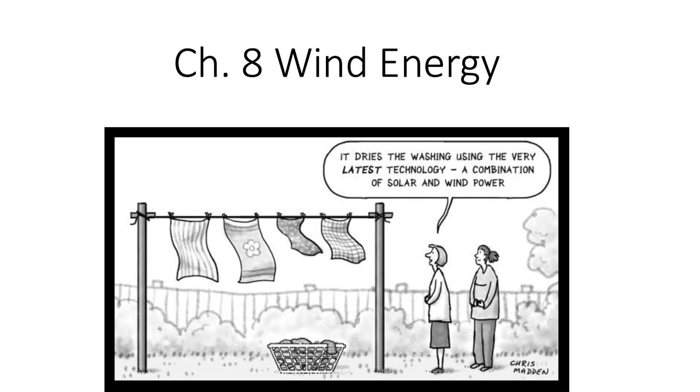Wind and solar have scaled up faster than any other sources of electricity in history. This is remarkable, showing how long it took to go from basically zero to 100 terawatt hours to 1,000 terawatt hours. For hydro, almost 40 years; coal, 32 years; gas, 28 years; nuclear, 12 years; wind, 12 years; solar, 8 years. That captures just how fast these technologies are growing.

Now, windmills are nothing new. The Persians are said to be the inventors of the first windmill sometime in the first millennium AD, and many think the design spread to Europe via the Crusades, but we really don't know.

The Persians used wind energy to crush grain, and then in the 1800s, one of the things that really opened up the West, especially the Great Plains, was the invention of the Halladay windmill, which you see everywhere out in the countryside.

The first offshore wind farms began operation in the 1900s - I wonder if that shouldn't be onshore. Then in the 2000s, there are incredible numbers of millions of homes powered by wind energy. And over on the right, we see the famous Dutch windmills.

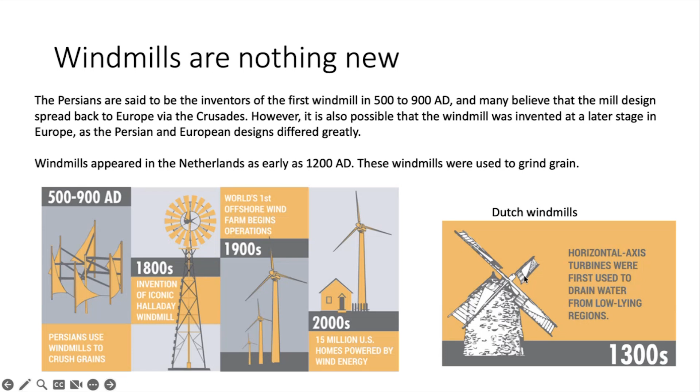That juxtaposition of the Persian design, with a vertical shaft and vertical axis of rotation circulating around, and this horizontal one that the Dutch modified - those are the two technological philosophies behind windmills. We'll see that it's been the horizontal axis that has taken over.

There are two main types of wind turbines today: horizontal axis wind turbines, or HAWT, and vertical axis wind turbines, or VAWT. We'll see different views of the horizontal type over and over again, and we won't talk much about the vertical one. One difference is that the HAWT has to be pointed in the direction of the wind, and the VAWT does not, but it's not hard to do that now.

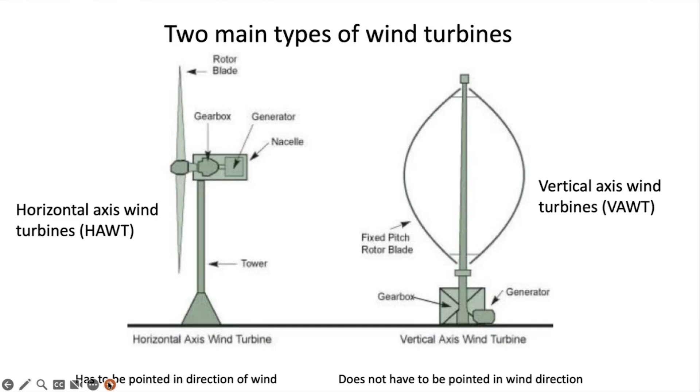Your book shows examples of a VAWT in Quebec. Currently, commercial development focuses on these HAWTs for turbines that generate more than a megawatt of electricity, and we're going to explain why later.

Watch this 2-minute video.

We've all seen those creaky old windmills on farms, and although they may seem about as low-tech as you can get, those old windmills are the predecessors for new modern wind turbines that generate electricity. The same wind that used to pump water for cattle is now turning giant wind turbines to power cities and homes. Have a look at this wind farm in the California desert - a hot desert next to tall mountains, an ideal place for a lot of wind. Here's another one on the windy prairies of Wyoming. Today's wind turbines are much more complicated machines than the old prairie windmills, but the principle is the same: both capture the wind's energy.

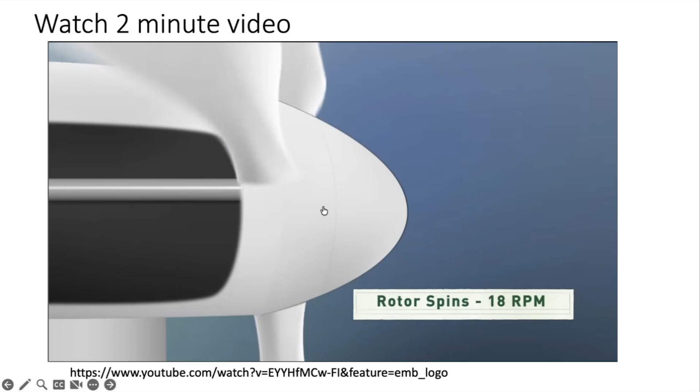Now, the blades are attached to a shaft, which only turns about 18 revolutions a minute, and that's not nearly fast enough to generate electricity by itself. So the rotor shaft spins a series of gears that increase the rotation up to about 1,800 revolutions per minute, and at that speed, the generator can begin to produce electricity.

So why are wind turbines so tall? Well, the higher up you go, the windier it is. More wind naturally means more electricity. Larger turbines can also capture wind energy more efficiently. The blades can sweep a circle in the sky with a diameter longer than a football field.

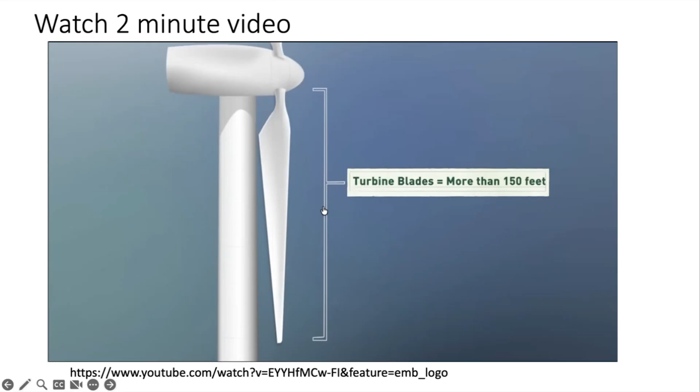Now, what's really cool is that even a small wind farm like this one in Wyoming can generate enough electricity to power more than 9,000 homes. And larger farms can provide much more clean energy for our homes and businesses.

And it's not just on land that turbines can capture the wind. Our oceans and the Great Lakes provide a reliable and consistent source of wind that we can capture and turn into electricity. The Energy Department is supporting innovative offshore wind projects that will help build some of the first offshore wind turbines in U.S. waters.

As the wind energy industry continues to grow, offshore development has the potential to significantly boost domestic renewable energy production, especially in coastal areas. With more than 50% of the U.S. population living within 50 miles of a coastline, capturing wind off America's shores has the potential to provide energy to countless homes and businesses. Wind energy, on land or offshore, a reliable and renewable clean energy source, helping move America toward energy independence.

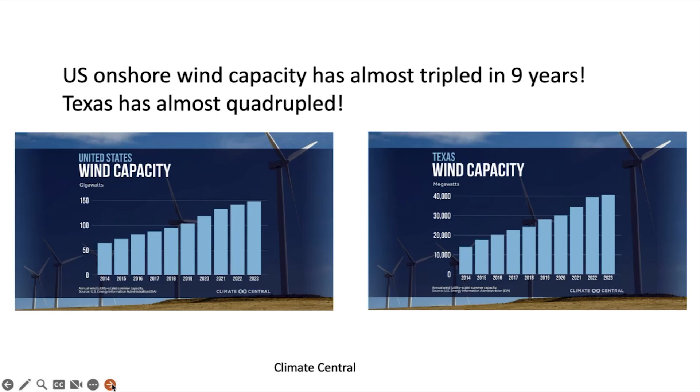Yes, Clint. This would be a good place to put in -- I'm interested in where the wind energy is being generated in China. Like, for example, Texas is uniquely adapted, the western part of the state, for wind energy, whereas some of the mountain states aren't so much, even though there's high wind in there. And of course, China is quite varied geographically.

Well, that sounds like an excellent idea for a student project.

All right, so as I said, Texas is by far the leading U.S. state in terms of wind energy because it's such a leftist, tree-hugging state. You know, it's far ahead of all those other states. I'm being funny, I'm being funny. So I mean, it just stands out, am I right? Laughing, I'm laughing.

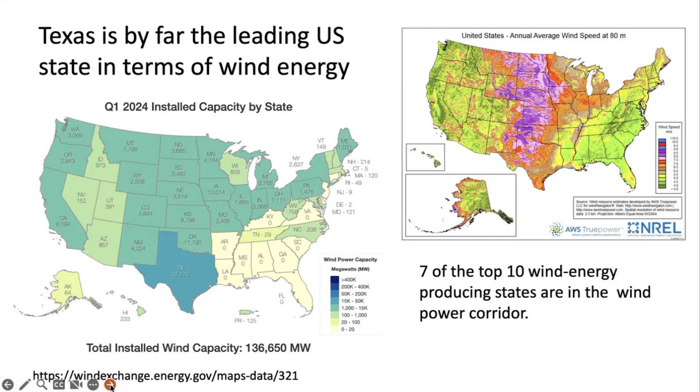So 7 of the top 10 wind energy producing states are in the wind power corridor: Texas, Oklahoma, up through here. They're all taking advantage of that energy source. Wind is number 2 and a rapidly growing part of the ERCOT energy mix.

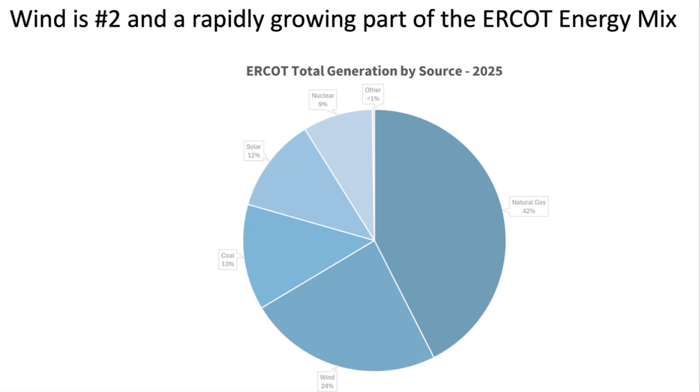We've talked about this before. Natural gas, both kinds, generates 42% of electricity. Wind is 24% and growing. Coal is 13% and shrinking. Solar is 12% and growing. Nuclear too. It's quite amazing how much of Texas's electricity is generated by renewable sources or non-CO2 generating sources.

So now we get into the book's discussion of noise and visual impact, because politicians will say things like, 'Oh, wind turbines are a health hazard and they're unsightly,' et cetera. The book talks about this.

Wind turbines emit a weak noise mainly generated by the movement of the blades through the air, producing a swishing or whooshing sound. There's also noise from the turbine machinery, which can be annoying to those nearby, but generally these wind turbines aren't near population centers. The latest wind turbines are much quieter than those of 50 years ago, and noise from the gears and generator has been reduced—that's easier to reduce than the noise the blades themselves make.

The noise from a modern wind turbine is like that of a tractor. A typical 1980s turbine generating 100 kilowatts, which is lower than today's, and a 1990s turbine generating 500 kilowatts, both emit about 100 decibels.

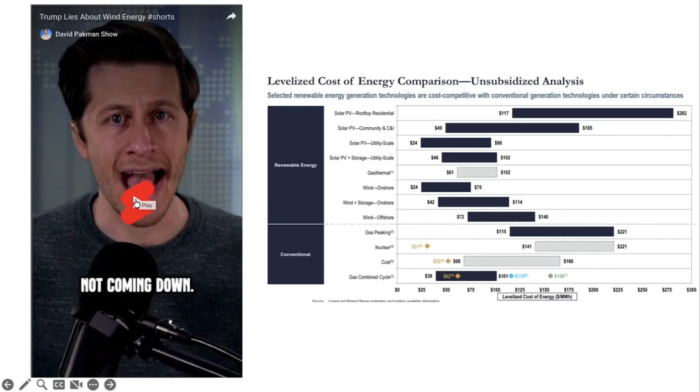On building infrastructure that's no good, but environmentally friendly, on doing windmills all over the place that are, by the way, the most expensive energy in the world. You cannot get more expensive. Now remember, windmills are not coming down—more windmills are being built. They're not even, I don't even know why I say windmills—more wind farms are being built than the number that are being decommissioned.

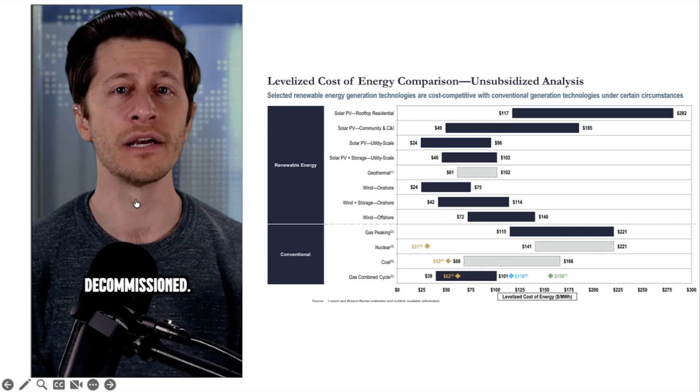I think what he's referring to is that the blades ultimately need replacement. It's not the most expensive form of energy—in fact, it's quite efficient. It has high initial costs to build the wind farms, but Trump doesn't care and his followers don't care.

All right, so let's go to the life cycle greenhouse gas emissions, land and water use. The next topic in your book.

There's a few tens of grams of CO2 emitted per kilowatt hour for wind generated electricity. The actual generation, the rotating turbine, doesn't put out any CO2, but you have to consider what it costs to create all the components that go into a wind station, and factor that out over the lifetime of the turbine itself. So it's a few tens of grams of CO2 per kilowatt hour versus about 1,000 grams per kilowatt hour for coal generated electricity. So it's ridiculous to talk about them as being anything other than environmentally friendly.

The wind turbines use very little water, but there is a reality that constructing a wind farm can cause erosion and disrupt wildlife habitat. And you see this all the time.

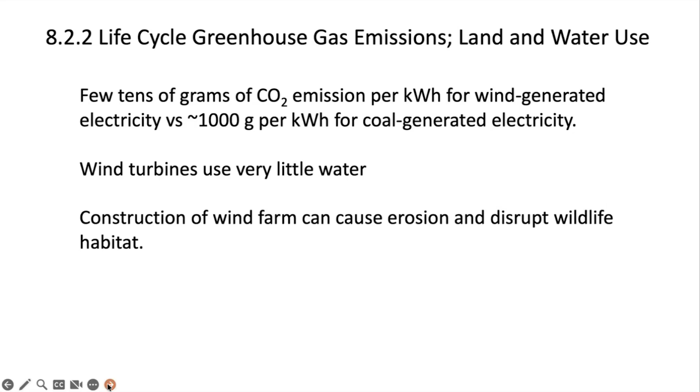All right, well, so you see this, right? Yeah, it shows up all over the place. And yeah, disposing of obsolete blades can be a problem. There's no question about it.

And the book says if we used radar to monitor migratory bird flocks, this could reduce bird fatalities even more. And we can use radar for that purpose.

There are higher rates of fatalities due to wind turbines for bats than for birds. Birds can see the turbines and avoid them. Bats use a kind of sonar to navigate, so they can be killed by what's called barotrauma, which leads to internal hemorrhaging due to rapid changes in air pressure around the rotating turbine blades. So if people were opposed to wind turbines because of their love of the bats, that would be a different matter than their love of the birds, because it's just nonsense that wind turbines are killing birds.

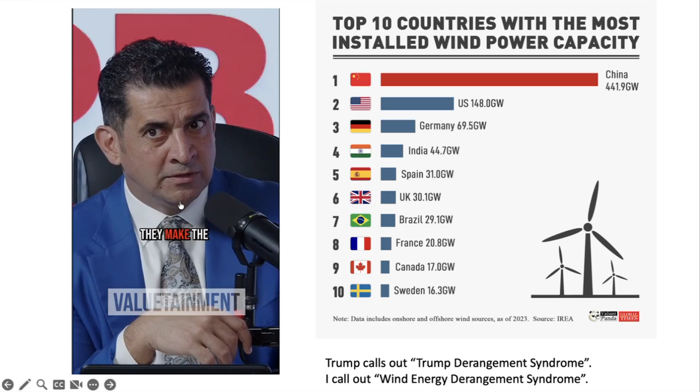Trump comes out and says the only person winning off buying windmills is China, and he calls them stupid people who buy windmills. They make the components - watch this. Windmills all over Europe, there are windmills all over the place, and they are losers. One thing is, the more windmills a country has, the more money that country loses, and the worse that country is doing. China makes almost all of the windmills, and yet I haven't been able to find any wind farms in China. Did you ever think of that? It's a good way of looking at it. They're smart, China's very smart. They make them, they sell them for a fortune, they sell them to the stupid people that buy them.

Yeah, so anyway, Trump will every once in a while talk about somebody that has problems with him as suffering from Trump derangement syndrome. And I would have to say, well, if that's a real thing, then I think there's a wind energy derangement syndrome as well, and he clearly has a pretty good case of it.

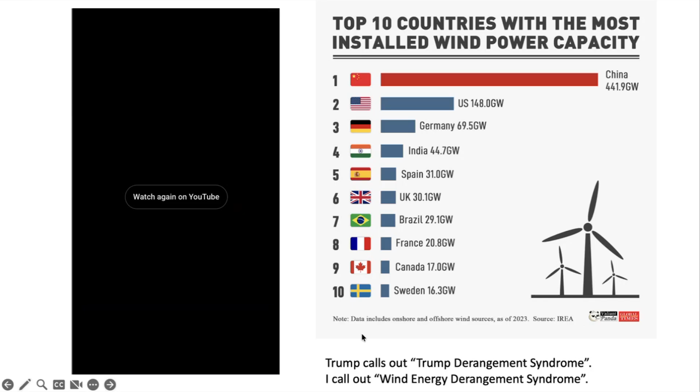Now the book goes into power and energy of wind. This is now a little bit of physics, but it's really interesting. Power is just work over time, which is just energy over time, and we quantify it with Newton meters per second, or joules per second, which is the same thing, and a joule per second is a watt. So wind towers are rated in terms of power capacity - the large ones have power ratings of 1 to 5 megawatts, probably bigger now.

So energy is equal to Newton meters - not per meter, that's a joule. So energy is how much work can be done by a force, Newton meters.

So wind energy is kinetic energy. It's moving. Here's the equation for kinetic energy: kinetic energy is 1/2 times the mass times u squared, where u is velocity. So that's the mass of the air, and that's the velocity in meters per second. You have to check the units: kilograms, meters per second squared, kilogram meter squared... yes, that's joules.

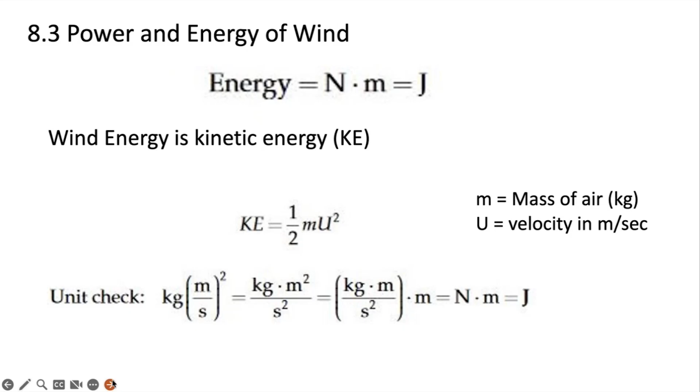Imagine a horizontal cylinder of moving air of area A swept out by wind turbine blades. This is the amount of air moving through the blades in a second. That's got a mass, right? That mass is equal to the density of the air times the volume. This is the volume of the cylinder, so that's equal to the density of the air times the area times the length. That length, the amount of material going through the wind blades, is basically the velocity times time. So the mass is equal to density of air times the area of the blade sweep times the velocity times time. Pretty simple equation - it's just the kinetic energy that wind energy holds.

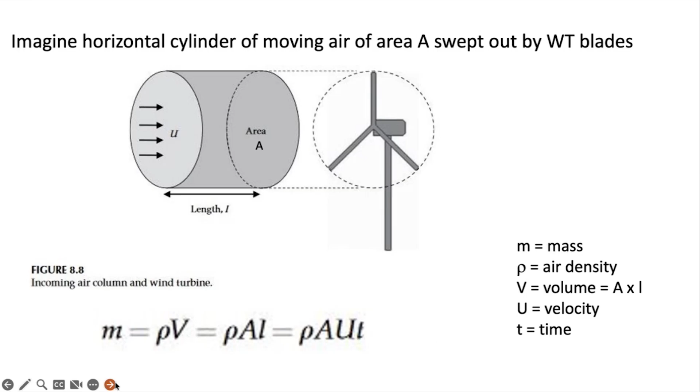In 2022, the average rated power of a new wind turbine in Texas was about 3 megawatts. That was a significant increase just from the year before.

The kinetic energy, we've already gone through that - we've seen this before. Combining the equations and solving, power is equal to kinetic energy divided by time. So that's going to be 1/2 density times area times velocity cubed. In order to get this area, that's just pi r squared, where r is the radius of the turbine. So the power scales with the square of the turbine radius and the cube of the wind velocity. This is very important: the power increases as the cube of the wind velocity and as the square of the blade length.

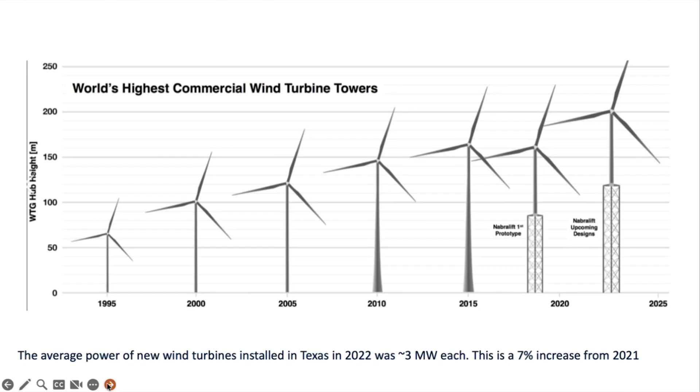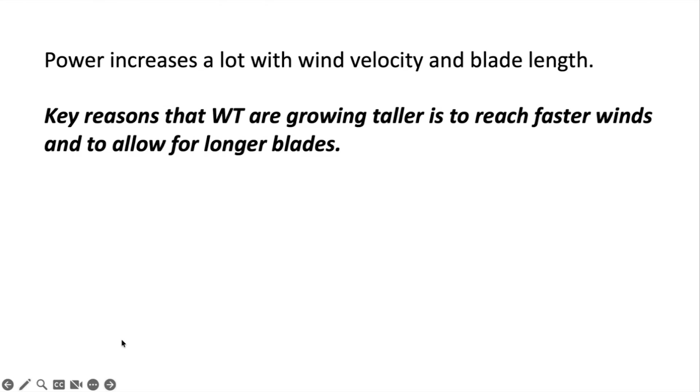So the most powerful wind turbine in the world that I could find is the Mingyang Smart Energy 22 megawatt. It has a rated capacity of 22 megawatts and a rotor that's over 310 meters long. That's amazing.

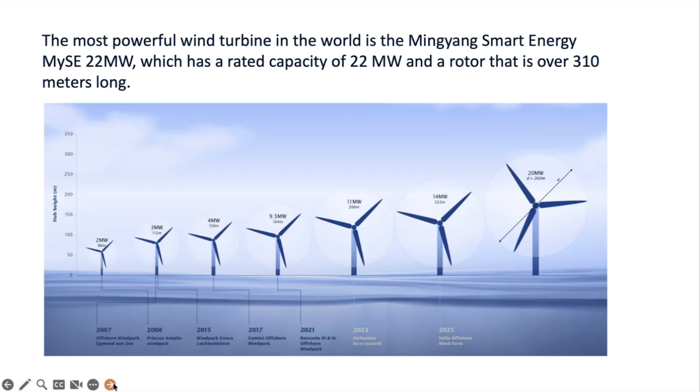Now let's talk a little bit more about how wind energy works. The book talks in section 8.4 about the coefficient of performance. This CP measures the percent of the wind power that can be extracted by a wind tower. So CP is the power in the wind turbine divided by the power of the wind.

We've already talked about the power in the wind by this kinetic energy equation. But in fact, the coefficient of performance for any wind tower is limited by what's called the Betz limit. I'll bet that's on the midterm. The Betz limit is only 59% of the available power in the wind. And you go, well, that's interesting. Why is that?

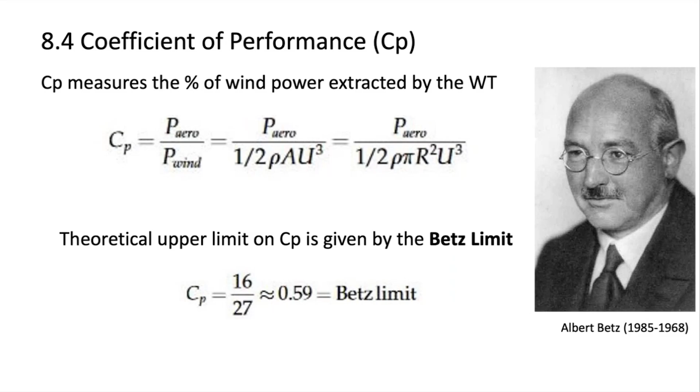So this is what your book explains. If all the energy coming from wind movement through a turbine was extracted as useful energy, the wind speed behind the turbine would drop to zero. If that happened, then no more fresh wind could come in—it would be blocked. So in order to keep the wind moving through the turbine, there has to be some wind movement, however small, on the other side with a wind speed greater than zero. This Betz limit basically addresses this quantitatively.

I'm not going to derive it, but basically the geometry limits any turbine efficiency to a maximum of 59.3%. Today, the most utility scale wind turbines achieve 75 to 80% of the Betz limit, so that's about 40% of the total wind energy that can be extracted.

The book also explains that, in addition, the coefficient of performance is a function of how fast the tips of the wind turbine blades rotate compared to the wind velocity. So the turbine tip speed ratio is omega R, where omega is the rotational speed—we talked about blades moving at 18 rotations per minute, converted to radians per minute, remembering a circle has about 6.3 radians in it. R is the rotor radius, and the wind velocity is in the denominator.

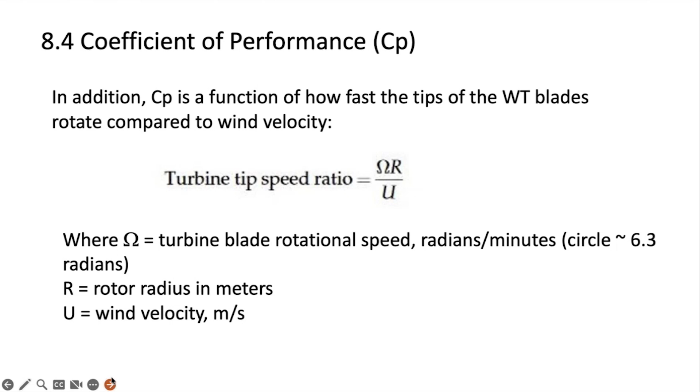This is basically showing the various turbine power coefficients. Up here is the Betz limit at 59%. This is the ideal efficiency of a propeller type turbine, like a wind turbine. It's lower until you get up to turbine tip speed ratios on the order of 4 from that equation. So here we've got different kinds of rotors.

There's a Savonius rotor—I don't really remember what that is. That's an American farm windmill, the Halladay type thing. These are Dutch multi-blade turbines. This is a modern vertical axis wind turbine, and this is a modern horizontal axis wind turbine. So you can extract more energy out of the wind using this technology than either of these others.

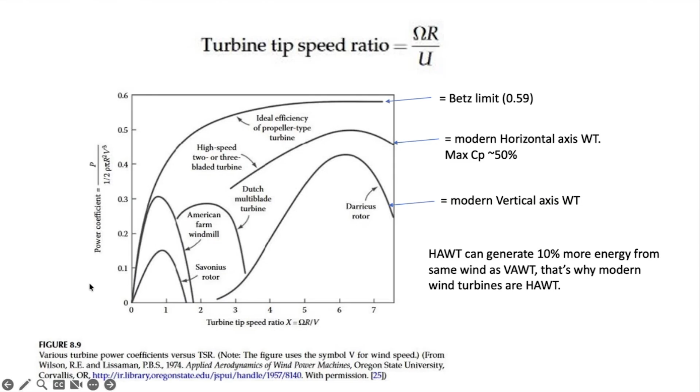In general, horizontal axis wind turbines can generate 10% more energy from the same wind as a vertical axis wind turbine. That's pretty much why modern wind turbines are all horizontal axis wind turbines.

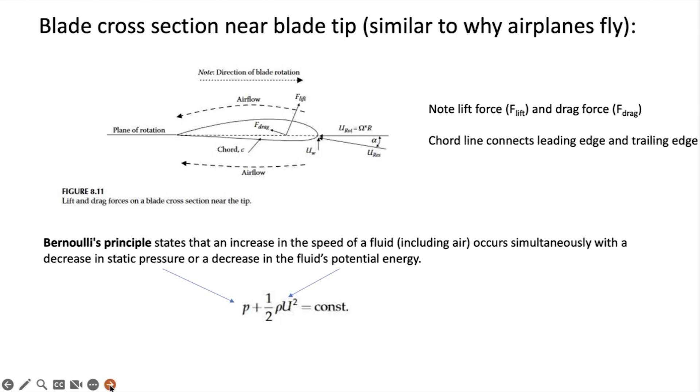This explains Bernoulli's principle.

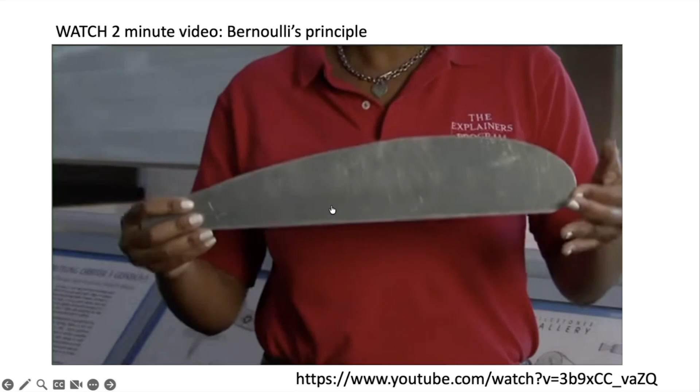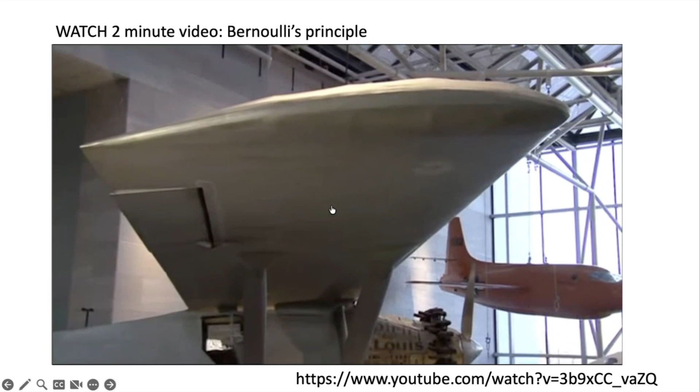Hi, my name's Jamila. I'm an explainer at the National Air and Space Museum's How Things Fly Gallery, and today I'm going to talk to you about lift. I'm standing in front of the Spirit of St. Louis airplane. It was flown in 1927 by Charles Lindbergh, and it was the first successful solo flight over the Atlantic Ocean. Now, how was this plane able to generate lift? How was it able to stay in the air? I can explain that using this airfoil here. An airfoil is like a cutout or a cross-section of a wing. So if I were to take a wing and slice it into pieces like a loaf of bread, this would be one slice of the wing. Now, if we compare this airfoil to the Spirit of St. Louis, we'll notice they have very similar shapes. They have curved tops and flat bottoms. An airplane's wing will be shaped this way because of something called Bernoulli's principle. Daniel Bernoulli was a Swiss mathematician who studied the movement of fluids like air and water, and he realized that a faster moving fluid will have a lower pressure, while a slower moving fluid has a higher pressure. Now let's apply this to our airfoil, or to a wing, so that when the plane starts flying and air hits the wing, you're going to get faster moving air on top. It's going to speed up because of the curve. At the bottom where it's flat, you're going to have a slower moving air, not as fast as the air on top. That slower air is high air pressure, and the faster air is low air pressure. That high air pressure pushes up on the airfoil or up on the wing, and that's why something as heavy as an airplane can fly. Don't believe me? Well, I have an experiment we all can try at home with a single sheet of paper. If I were to place this paper beneath my lips and blow, would it go up or would it go down? Let's see what happens. We notice that the paper goes up, and the reason why is because of Bernoulli's principle. When I blew my fast air on top of the sheet of paper, it was a lower pressure than all of the air in the room, because the air in the room is slower than the air that I was blowing. So that high air pressure works from beneath and it pushes up on our sheet of paper. And the same thing is happening to an airplane's wing, and that's why something as heavy as an airplane, like the Spirit of St. Louis, is able to generate lift.

She's talking about airplane wings, but the same thing applies to turbine blades. Instead of using that shape to lift a heavy object in the air, that pressure difference causes the blades to rotate. It's not the wind pushing the blades, it's the wind blowing around the blades that's causing the lift force that causes the rotation.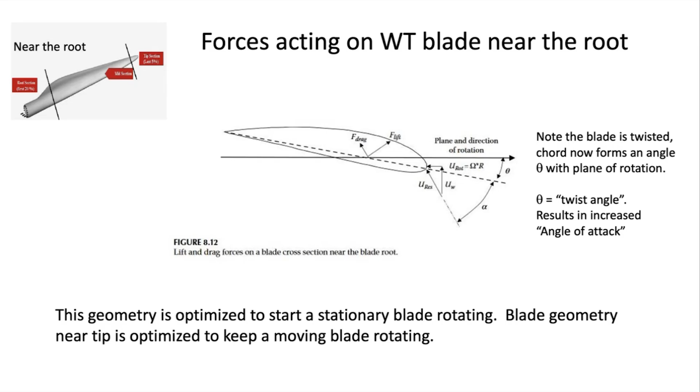All right, now this gets us to the physics of wind. The wind is different. We've already seen that map of the United States showing the wind in the high plains is optimal, the wind power corridor is this region. Most of what we've been doing now, you might ask, what's this got to do with earth science? But now we can talk about winds, which is earth science.

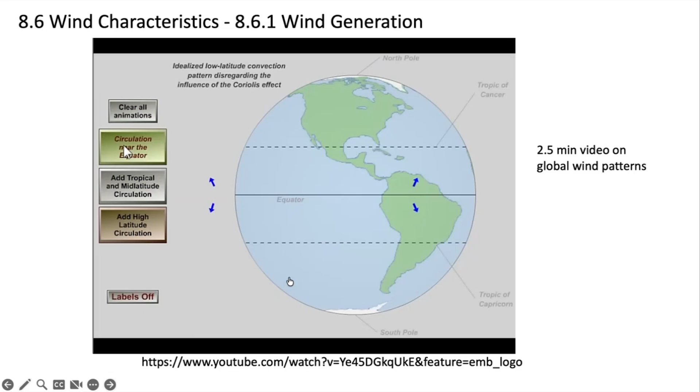This animation shows global wind patterns and the reasons the air circulates the way it does, and patterns of rising and sinking air and how that relates to precipitation. The engine that drives it all is the intense heating by the sun near the equator, where the sun shines at a very high angle of incidence. This hot air near the equator, being less dense, rises upward, moves toward the poles, and gradually sinks at about 30 degrees north and south latitude. This creates big spinning circles of air called Hadley cells.

Near the equator where the air is rising, it loses its ability to hold moisture, and you get a band of high rainfall and low pressure because air is leaving the equator. Where the air sinks in these belts around 30 degrees north and south, you get high pressure sinking air, which creates areas of clear skies and desert climates.

Now, as this air circulates and tries to flow back toward the equator along the Earth's surface, or as some heads toward the North or South Pole, the Coriolis effect, the spin of the Earth, causes it to bend and turn, creating the two big wind belts that prevail on Earth: the trade winds, northeast and southeast trade winds, and the prevailing westerlies. These winds curve in the way they do because of the Coriolis effect. They curve to the right of their path north of the equator, and to the left south of the equator, ending up flowing from east to west or west to east.

Now the other big factor is what's happening at the poles. At the poles, the air is cold, and the cold air wants to sink. As that cold polar air sinks, it heads toward the equator and bumps into air heading toward the pole, creating an area of rising air. Rising air produces high precipitation belts at about 60 degrees north and 60 degrees south latitude. At the poles themselves, precipitation is quite modest because the air is sinking, creating low precipitation.

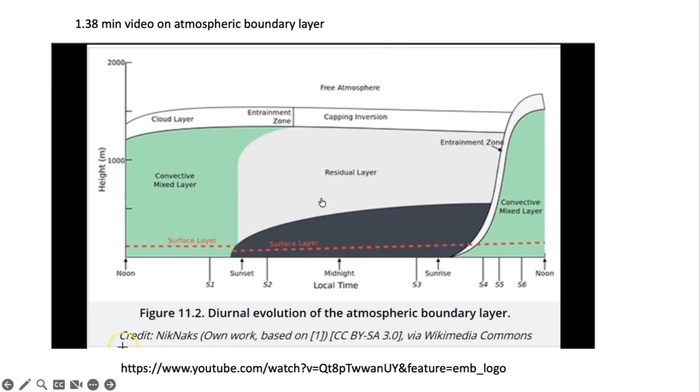Okay, here's a question for you: learning that, what time in a 24-hour day would you get the best performance out of a wind tower? Anybody?

Afternoon? No—in the afternoon, the atmospheric boundary layer is well developed and tall. At night? Yes, at night, because the atmospheric boundary layer collapses and is closer to the surface, and then in the daytime, as it heats up, it rises again. So you have all of this turbulence, and wind towers don't like turbulence. We're going to talk about turbulence again.

All right, so back to this map. Does everybody understand that one of the challenges is that wind energy is at a maximum at a time you don't really need the electricity? It'd be nice if the maximum time was in the afternoon, because that's when our demand is high, right? And people are awake.

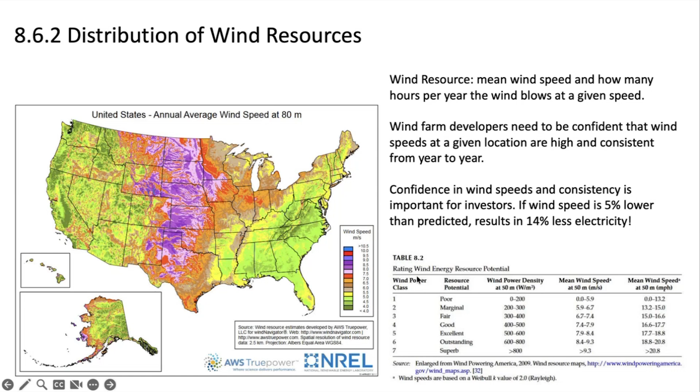So why are the U.S. high plains so windy? We didn't see anything in either of the videos that would help us understand why the wind power corridor is where it is.

So I reached out to a professor at Texas Tech, who is well known for his work in wind energy, and he responded to my email: 'I believe that for the South Plains, the key factors are the high frequency of clear skies and the elevation, particularly during the cool seasons. That promotes mixing down of the stronger winds aloft.' So that's what he had to say about why the wind corridor is where it is.

Now there are some other considerations that are useful to think about. We've seen the wind power corridor over and over again, but the interesting thing is it's also a low population region, and wind farms are much easier to put up in areas where there aren't very many people.

You're always going to have complaints about wind power, from not only the President of the United States but also local populations. Anytime people see an opportunity for a lawsuit or a settlement, they might take it. So you want to be away from people, because the proportion of the number of complainers per unit area is some constant times the population of that area. So low population is good.

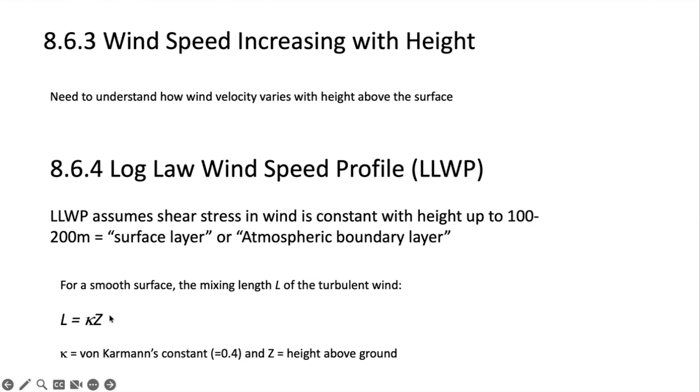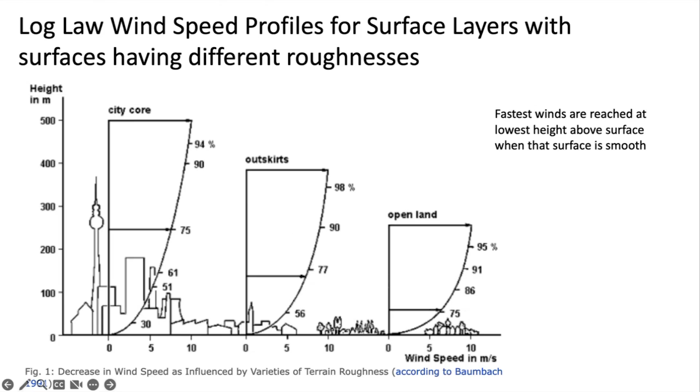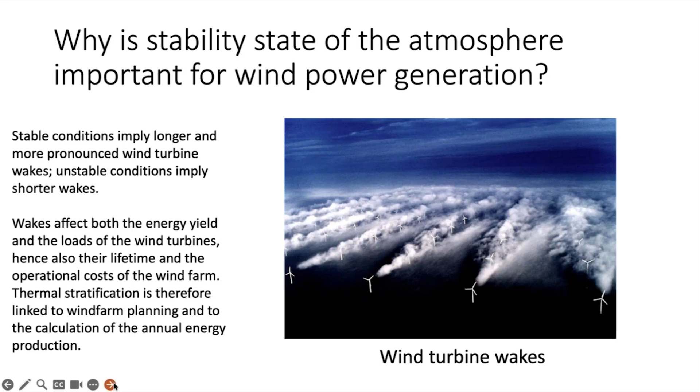Which one of these laws is most appropriate for the region being considered as a wind farm is important. Your book talks about that for neutral flows - remember we were talking about atmospheric stability, unstable sinking, rising. So for neutral flows, alpha is about 0.143. For unstable flows, alpha is less than 0.1. And for stable flows, alpha is greater than 0.3.

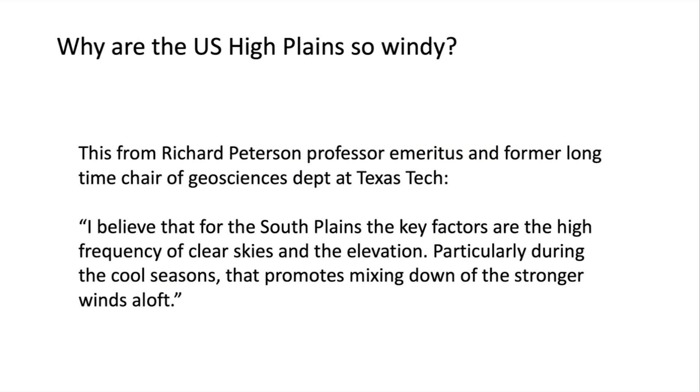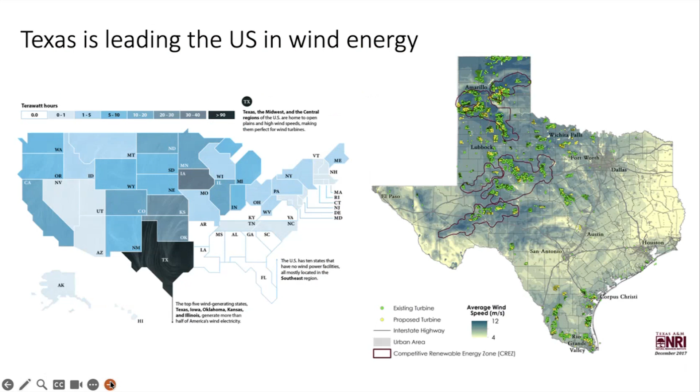So you're looking for something that's going to give an alpha as high as possible. You can see the difference in the wind speed for those two alphas - there's an 89% greater power with a higher alpha. Getting this right is critical for any kind of budgetary analysis, projections about what's going to happen financially to the company.

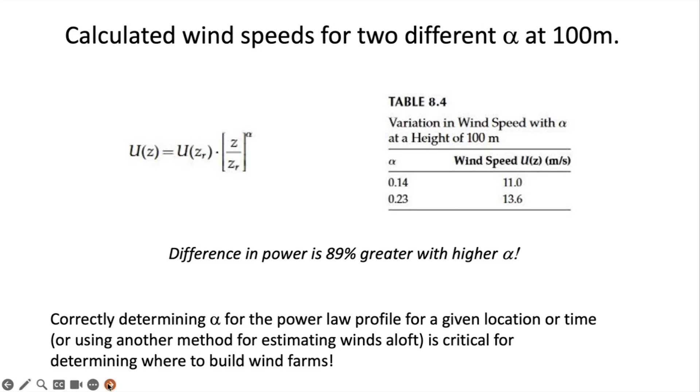Very important. So then the book goes into this probability of observing a given wind speed. Here we're looking at a Gaussian PDF. What you've got here is the frequency of events versus the magnitude of the event. This could be anything - earthquakes, oil fields, you name it. Grades, well maybe not grades, I don't know. But this is a Gaussian distribution, simple statistics. That's a normal probability density function.

Here's the mean of all the values. And this area relative to this entire area is the probability of some velocity of some thing happening at this interval. So you need to understand the probability of observing a given wind speed at the elevation you're interested in. So you're going, okay, that's pretty easy.

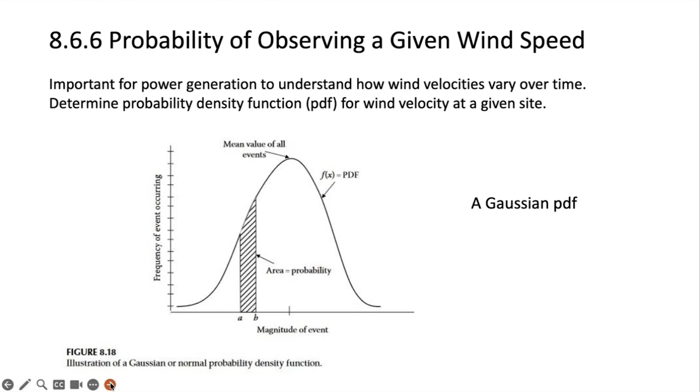And you have to measure it, figure out what it is at the elevation above the surface that you're interested in. So now wind turbines can't operate if there's no wind - that goes without saying - but they also can't operate if the wind isn't high enough. So one of the things a company wants to know is what percentage of the year will the wind velocity be too low for a wind turbine to operate? And this is the cumulative distribution function.

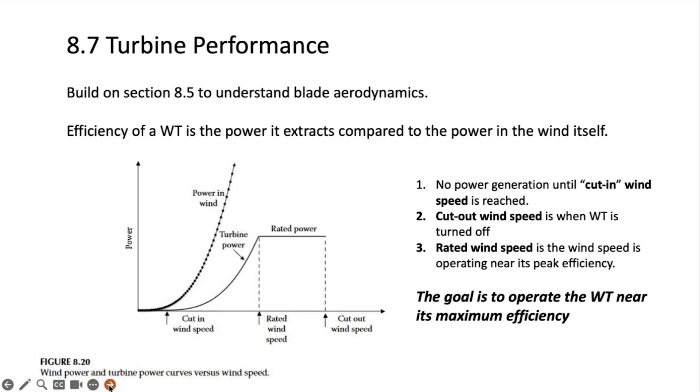So when we talk about wind power capacity, this is what's being considered. But the reality is, with the wind velocity probability density functions, it's not going to be that speed all year, even in the high plains.

Let's watch a video. Now a real wind turbine, if you look at it, it's going to take a bit of a wind speed to start. So there is a region from 0 wind up to a certain wind speed called the cut-in wind speed, where there's no power produced by the wind turbine. Also called region 1. Nothing's happening. Then once the cut-in wind speed is reached, power ramps up.

You can see that it's in an almost parallel slope to the power that becomes available with the wind speed itself, but it's only a certain fraction of that amount that the machine, the wind turbine rotor, can actually capture. And we're going to learn about how much that is. That region is called region 2.

Power ramps up. So ideally you want to produce power with wind turbines, want to make money, right? Want to sell the power. Ideally you want to go all the way up here, but you're limited. What limits you?

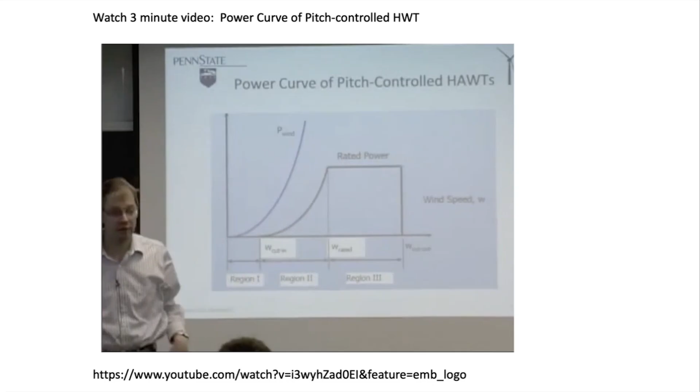Generator. Okay, first thing that limits you is the generator. Generator can only take so much power and feed it into the electrical grid. So you have to start controlling the power.

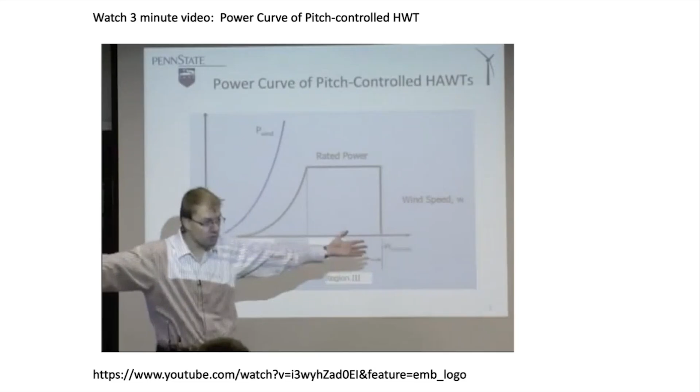That's the typical power curve of a modern pitch-controlled horizontal axis wind turbine. So you control the power by changing the blade pitch, changing the loads, and hence the torque and power produced by the rotor. That wind speed, where you reach the rated power of the turbine and the generator, is called the rated wind speed.

From there on, as the wind speed increases, you have to pitch more and more the blades to accommodate for the fact that more wind power is coming in, but you're only allowed to capture so much of that. So essentially, you have to adjust the blade pitch angle such that local angles of attack acting on local airfoil sections become smaller, hence the loads become relatively smaller, and the power stays the same.

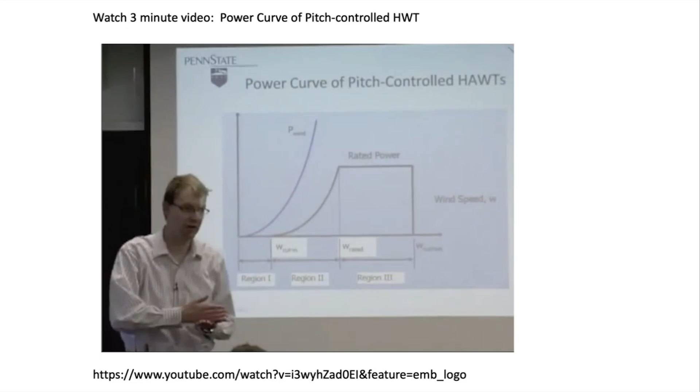So then at the end here, usually if the wind speed becomes about 25 meters per second, you have to shut down the turbine. Why is that? Not a generator problem. It becomes a blade loads issue, a load and fatigue issue.

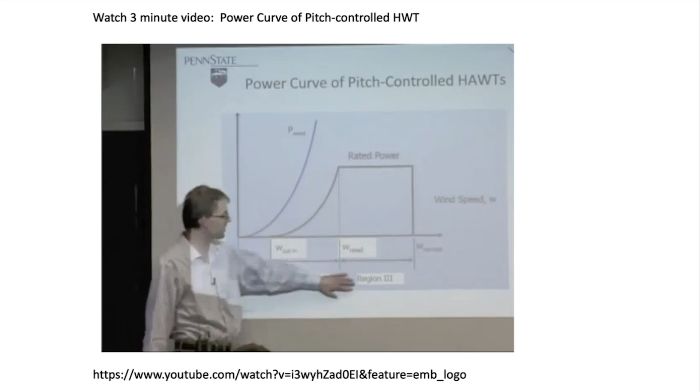So if it's a storm condition, in the storm you have more fluctuations, large amplitude, and that poses a problem. You have to shut down the rotor. So that's the cutout wind speed. We're having these three distinct regions in the power curve of a modern pitch-controlled horizontal axis wind turbine.

Now, we haven't talked about pitch control yet, but we will.

Disk theory. So we talked about the Betz limit and why there has to be some velocity in the air behind the rotor, but it's going to be a fraction of that coming in. So here we're looking at a very simple equation. The velocity of the wind is greater than the velocity of the disk. The air through the disk is going to be greater than the velocity of the air through the wake.

The mass of the air moving from left to right is constant, and because the velocity decreases behind the rotor, the area of moving air must increase. So the book talks about the axial induction factor, which is just the velocity of the wind minus the velocity of the disk divided by the velocity of the wind.

That varies from 0 to 1. A low A means a slow wind, and the upper limit on A is the Betz limit. Then the velocity of the wind through the disk is 1 minus A times the velocity of the wind. And then you can use Bernoulli's theorem to calculate the velocity of the wind behind the rotor and see how wide this region of wind velocity is going to be.

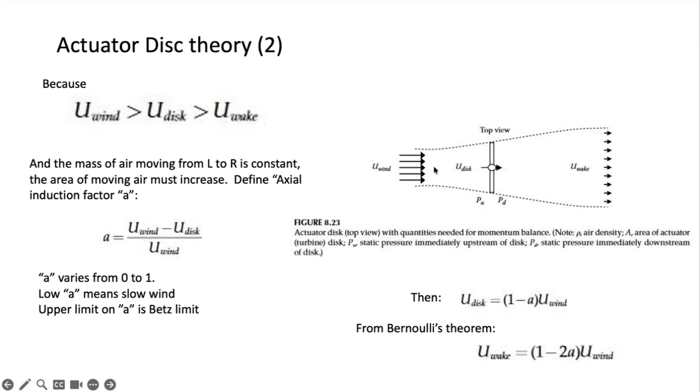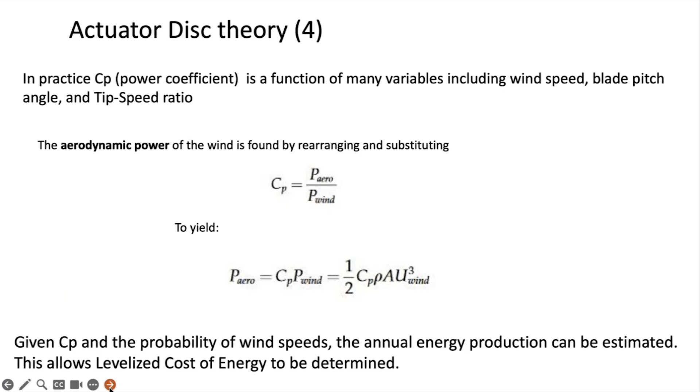All right, so here we're looking at an example from your book to determine the annual energy production for a wind turbine with certain characteristics. So here's the power, and we went through this equation. So obviously, the wind velocity is the thing that you want to understand, because your coefficient of performance is set by the engineering. So they're giving an example.

First, calculate the power at 10 meters per second, which is shown there. That's equal to 0.5 times all of this, and that gives you 2,000 kilowatts or so for that wind speed. You can see that wind speeds between the rated wind power and the cutout speed, that is constant at 5,000 kilowatts. So you really want to know how many days of the year the wind is going to be at this speed at the height of the rotor, and then also you're going to get some power out of this part as well. So that's the rated power.

And you'll see that when people talk about how much wind energy capacity there is in Texas, they're dealing with the rated wind power times the number of turbines. So limiting power production to rated power is needed for structural stability and to limit electricity added to the grid. We haven't even talked about what ERCOT's going to tell these companies about how much of their energy they want.

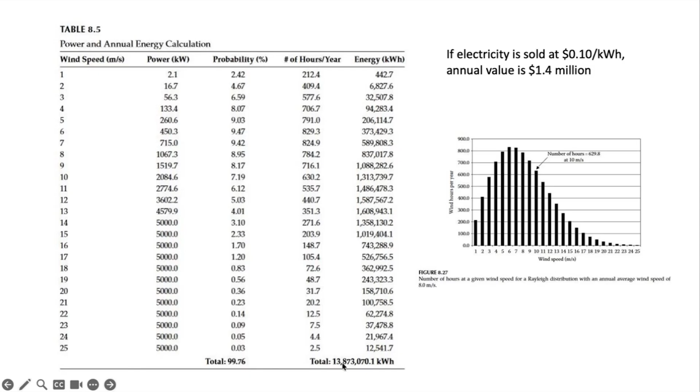So the capacity factor of a wind turbine is a ratio of energy produced to the rated power times hours per year. In this example it was 13,000... megawatt hours, right? Isn't that right? No, I got that wrong. There's 1,000 kilowatts in a megawatt, that's what we're doing. So it is 13,873 or 880 megawatt hours.

And the rated power is 5 megawatts for this thing, and there are 8,760 hours in a year. So this is what it could generate if the wind always blew at the rated wind velocity. If you look at that and divide it by this, you'll get 31.7%.

And the book is telling you that your typical wind turbine capacity factors vary between 20 and 40%. Obviously you want to be at 40%, not 20%, because it's not going to cost that much different to put up a wind tower. But if you have that big of a difference in the amount of income you're getting, that's going to be an issue.

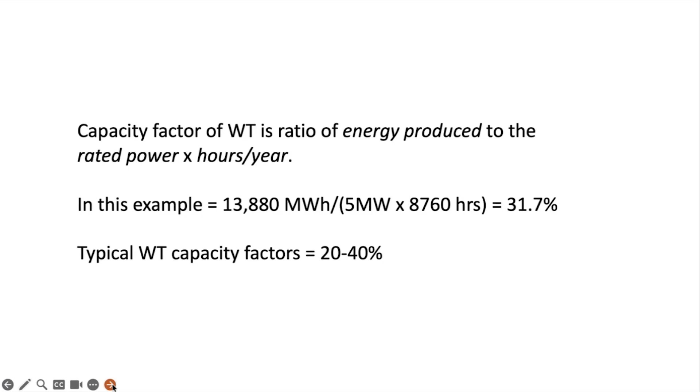Now, we haven't talked about blade pitch. Let's watch this video and learn something about it.

Uh-oh, got to go back to the beginning. Sorry about that.

Now obviously, there's a lot of engineering going into this, because very small improvements will result in significant cash flow differences.

Your book talks about what that does to the power curve. There are two examples being shown here. One is the rotor speed held constant by varying the blade pitch, so that's constant speed, variable pitch control, and that's the solid line. It reaches the rated wind power at a slightly higher velocity than this other one, where you can vary both the rotor speed and the blade pitch, that's variable speed and variable pitch control.

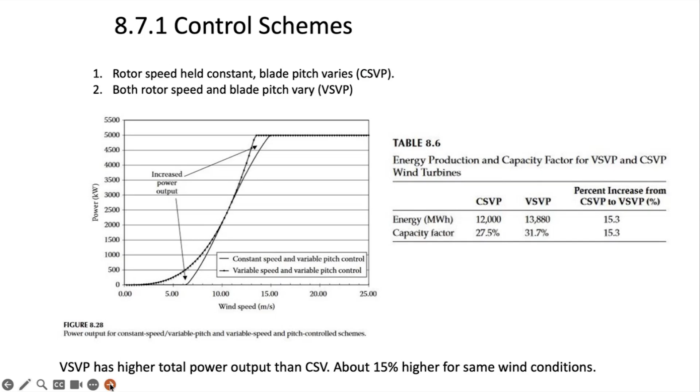So then the book goes into levelized cost of energy for a wind turbine, and NREL, which of course now is the National Laboratory of the Rockies, because renewable energy is a dirty word now. This tool focuses on the most widely used technologies, which are horizontal axis wind turbines, 3 blades, upwind, pitch controlled with variable speed, both for offshore and onshore. And there's a tool there that you can dig into if you're interested.

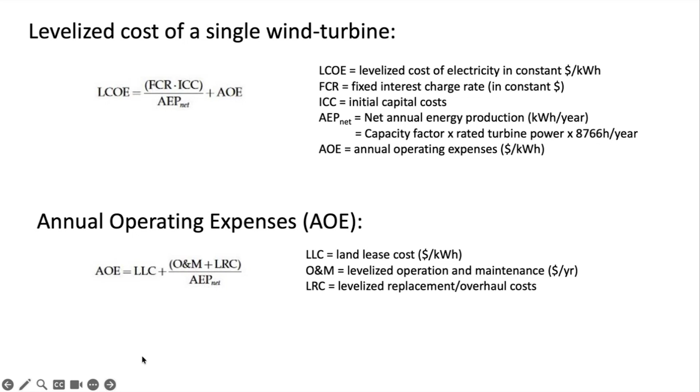It's all housed in what's called the nacelle, and that total is a very significant cost. The balance of station is basically foundation, support structure, transportation - you might have to build roads. There's assembly and installation, electrical interface connections, cables, engineering permits. This is typically $700,000 per turbine for onshore.

Your book gives the example of a typical onshore turbine, which costs about $1,100 per kilowatt. So a 5 megawatt turbine, which isn't ridiculous, and that 5 megawatt is the rated power, as we just discussed, so that would cost $5.5 million, and about $700,000 of that would be the balance of station costs. Offshore turbines have additional costs because you have to modify equipment for the marine environment.

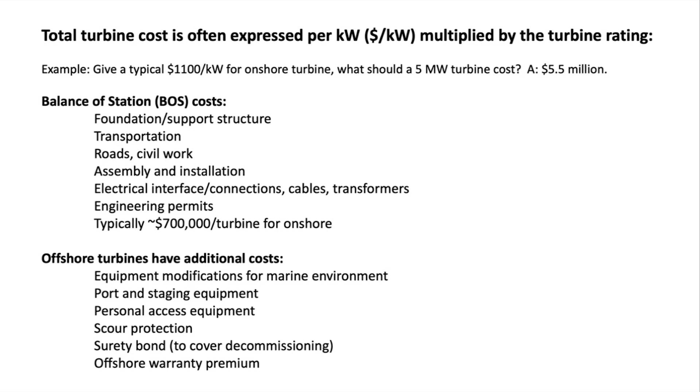You've got port and staging equipment, personal access equipment - people have to be able to get on the turbine and service it. Scour protection around the base of it. There's got to be a surety bond, which covers the decommissioning because these things sometimes come down. And then the offshore warranty premium.

So this is sort of the typical operations and maintenance cost for a typical wind turbine, for a megawatt scale: the drivetrain, the balance of station costs, operations and maintenance, levelized replacement costs, the rotor, the tower, the controls. So that's just sort of where the different costs go for the operations and maintenance costs.

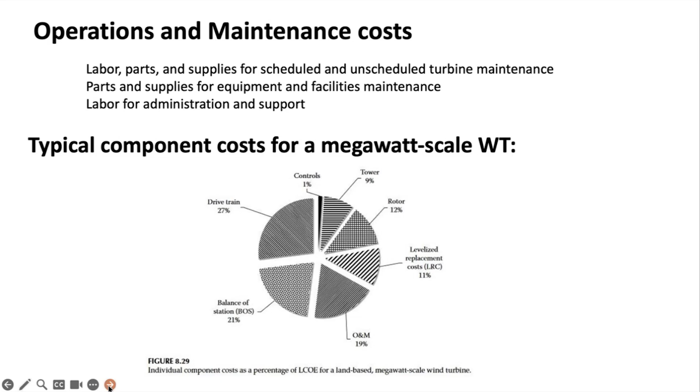All right, yes, John. Well, not to be controversial, but I think this kind of understates the cost, and that's been one of the issues historically - you're taking the cost of putting it in place, but especially the offshore ones are very far away, so you've got to put in a huge amount of expensive infrastructure to move it to the cities from West Texas, or move it offshore into the cities and things like that too. Oh, absolutely, no, there's no question that an offshore installation is more expensive than onshore for the reasons that you say.

So the book talks about whether windmills pay for themselves. The following example is very simplified, but it demonstrates the concept. According to the U.S. Energy Information Administration, the average wholesale price of wind power in Texas is $26 per megawatt hour, which equals 2.6 cents per kilowatt hour, significantly less than what we're paying. That's likely to go up because we're going to need more electricity in the future.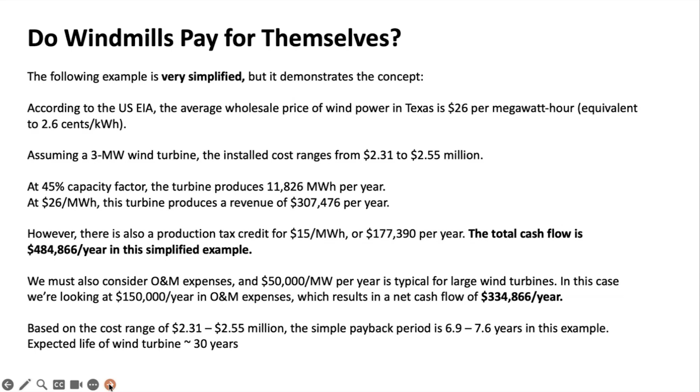Then your book goes into wind farms. We've been just talking about individual towers, and wind farms are what's actually happening. At wind farms, they're not growing wind - they're basically groups of turbines producing electricity at a single location. It's just a lot simpler to have them grouped together as much as possible, in terms of infrastructure, operations and maintenance, and organizing the land.

That's a lot of energy, because Comanche Peak, one of the two nuclear plants, is generating on the order of 10% - the two nuclear plants together generate on the order of 10% of Texas electricity. So Comanche Peak alone is 5%. So you can see where they are.

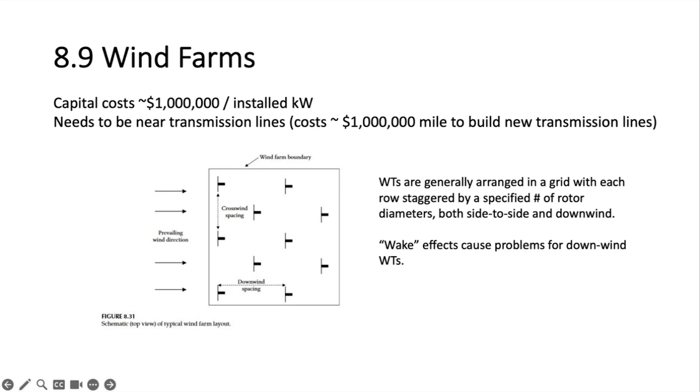So here's a video talking about the wake effect. You'll be seeing what's going on with power for a couple of turbines, one interfering with the other. You can see that this is high power and then it drops off. This is kind of a numerical model for what's going on with the wind, and this is a profile with one wind turbine here and another one down here.

Yes, Clint. And then there's the Irish wake effect. Okay, I'll shut up.

Oops, sorry, there we go. So this goes on for quite a while, but this is just basically setting up the experiment. We don't really need to watch that. I think they're going to leave it up for a while. You should be able to click ahead. Maybe. Yeah, now you've gone and done it.

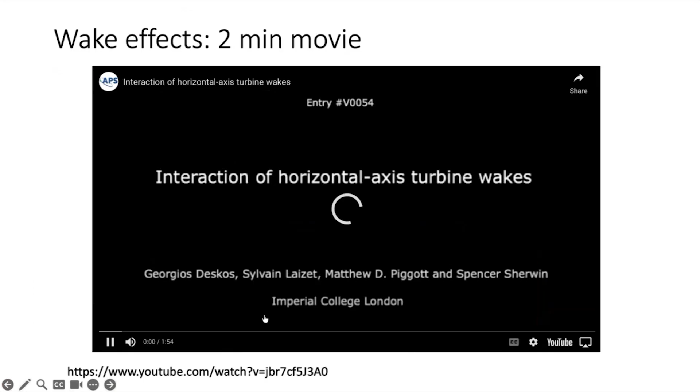So here we've got two turbines operating in line. You can see where the two are, and you see the wakes coming back from them. So there's the power being generated in the second one as a result of the interference from the wake of the first one.

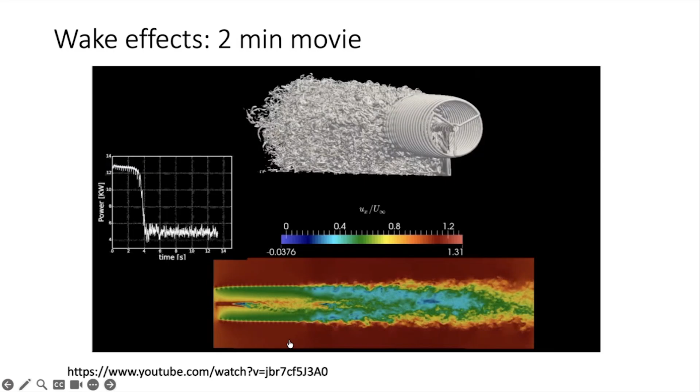That color scale is telling you something about the wind velocity relative to the incoming wind velocity. So you don't want that, because that second turbine is not producing maximum power. Here we've got an offset, and it's only a partial offset, but you can see the energy is quite variable. There's a lot of turbulence. That's why the power coming out of the second one is varying so much. So you want to avoid this. You want to plan your wind farm so that this problem is not significant.

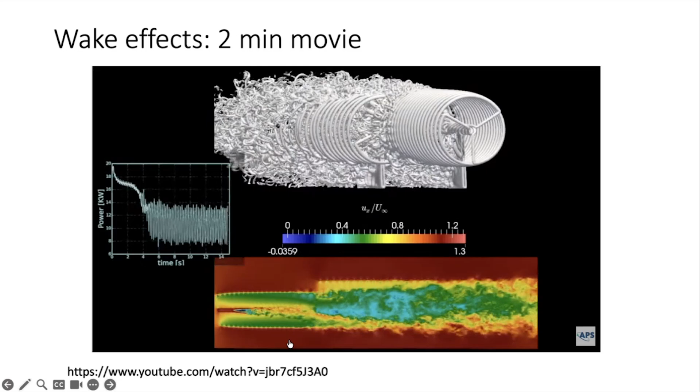So here we've got wind power ratio for the first turbine, and here's the second turbine. This is the wind power ratio: local wind power normalized by wind power level at an inlet. So we're simulating what's going on. You have to do numerical modeling to model these various configurations of turbines on a wind farm to extract maximum energy. You'll hear about numerical modeling in a lot of geosciences related studies, basically using computers and appropriate physical models to model the behavior of what's going on.

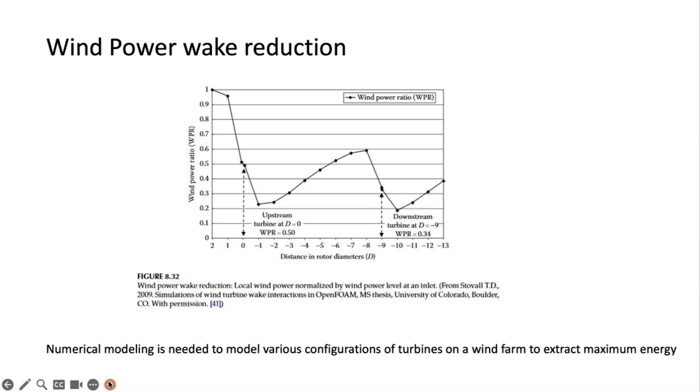So here's an example. Here's a wind turbine and what's happening behind it. This is basically the wind turbine, and that's D-naught, the diameter of the wind turbine rotor. This is the incoming wind velocity profile, taking into account the change in wind velocity as a function of height above the surface layer. And then this is the distance downwind as a function of rotor diameters.

So, X divided by D-naught: this is 4 rotor blade diameters down, this is 8, this is 12, this is 16, this is 20. Obviously you want a big rotor because you get more power out of the wind if you have that, but the bigger it is, the more it's going to cause problems downstream.

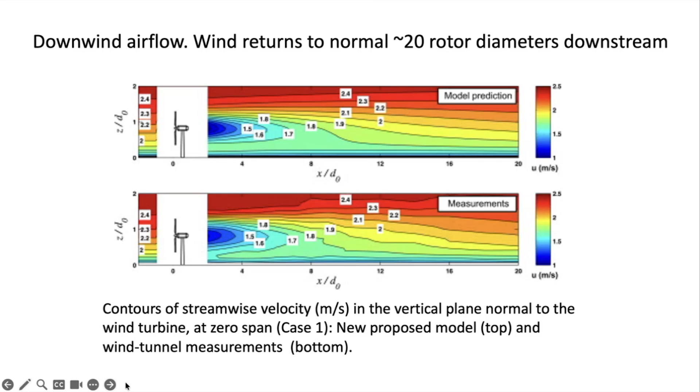So this is a video from the UTD wind tunnel, which is just up the hill at that research center—I forget what it's called. Anyway, just up on Waterview, just up the hill. This is a wind tunnel where you can do experiments. Oh, it's the Waterview Science and Technology Center, just at the top of the hill, up Waterview. So here they are building it.

All right, so that's kind of a cool thing a lot of people don't know about our wind tunnel. And they were having some problems with it. I'll be interested to hear what Valerio says about it on Monday, whether it's back up and running or what's going on.

Now let's talk about offshore wind energy. Let's compare these two maps, both showing wind velocities using the same scale. What you can see immediately is that offshore wind energy is higher than onshore wind energy. And it's interesting where it is. The offshore wind energy is really high off Northern California and Southern Oregon, not very high off Texas, so we don't expect to see a lot of offshore wind energy in Texas. But look at the resource off of New England. The other interesting thing is that this part of the United States doesn't have very good onshore wind energy resources, but it's got huge offshore wind energy resources.

So the United States has been looking at these offshore wind energy resources, especially for the Northeast. Look at this dark red, the orange and red. It's typically on the order of 10 meters per second. That's a really nice wind resource.

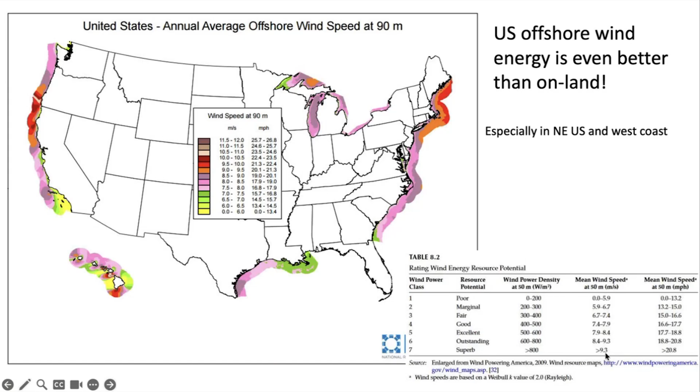So let's go compare that to our Texas wind resource. We're in this purple region, on the order of 8.5 to 9 meters per second. So this offshore wind resource is actually better than that in Texas, but as John suggested, there's a lot of other expenses associated with offshore wind, just like with offshore drilling. There's tremendous opportunities there, but it's a lot more expensive than onshore drilling. So, 10 meters per second, that would be a superb wind resource according to this.

Yes, Clint. Right, and even though I haven't been there, and I don't know if any of you have, you've probably all heard of nor'easters, and they are a thing. They'd almost certainly have to shut down the towers because that would exceed the steady wind they get there. Well, my guess is they have plenty of that too, otherwise there wouldn't be any planning towards it. Yeah, they're not going after nor'easters, that's for sure.

So the offshore wind farm advantages, especially for the Northeast: they do not occupy land, which is a huge advantage in high population areas like coastal New England and New York. They have better wind resources, reduced turbulence because the ocean doesn't have the roughness that the land has, and steadier, higher speed winds. With that higher capacity, you've got a better match with the grid - it's a less intermittent source than onshore wind. There's closer proximity to electrical load centers, so lower transmission costs, better able to serve high cost regions, and importantly, it avoids land-based size limits. You can use shipping, so there's no roadway limits. The assembly can use sea-based cranes, which can be taller, and these larger wind turbines are more economical.

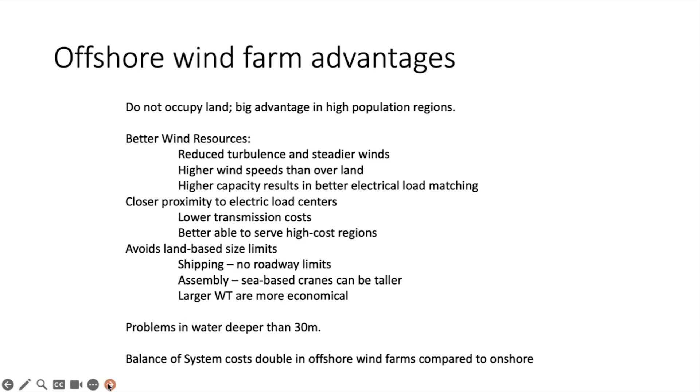That's the projection by the book, but the reality is that once again the Trump administration has said that this is bad, and they've actually pulled permission for some wind farm developments, I believe off Connecticut or Massachusetts, that are well underway, and just basically told them to stop, which is now in the courts. So it'll be interesting to see how that plays out.

Just to keep in mind, of the 48 contiguous states, 28 have a coast, and these use 75% of U.S. electricity. The New England states and the Great Lakes states have negligible onshore wind resources, but excellent offshore wind. There's a tremendous resource here, and most of it lies less than 3 miles offshore in U.S. waters.

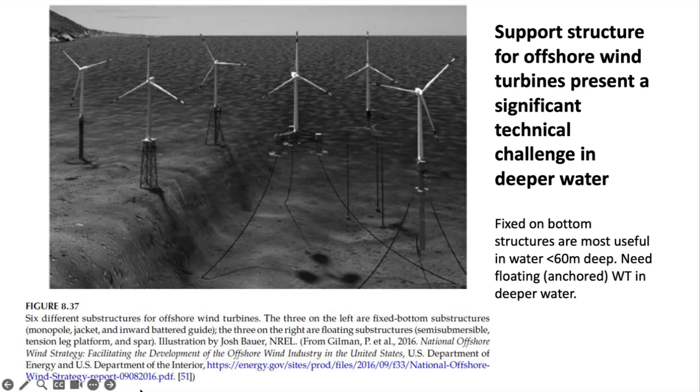Your book talks about System Advisor Model for wind farm analysis, a numerical performance and economic model. People who really want to get into this can look at this. It said the NREL SAM is updated frequently, but I'm not sure if that's true anymore given all the changes at the National Renewable Energy Lab. We're well aware that one of the administration's biggest bugaboos is wind energy. We won't see as much criticism of solar photovoltaics for some reason, but wind energy, I wouldn't be surprised if this has all been shut down. Your book continues with this, so you can look at that if you want.

And that is the presentation. I think we've really covered a lot of material today and last time, and we're going to have a very interesting follow-up with a UTD professor next Monday. I hope you guys come with good questions. Ask him, because it's always hard for somebody doing research in an area to know how to pitch their talk, and I think you guys know an awful lot about wind energy now. I hope you pepper him with good questions. We're a little bit ahead, got a few minutes left. Does anybody have any questions or anything you want to discuss?